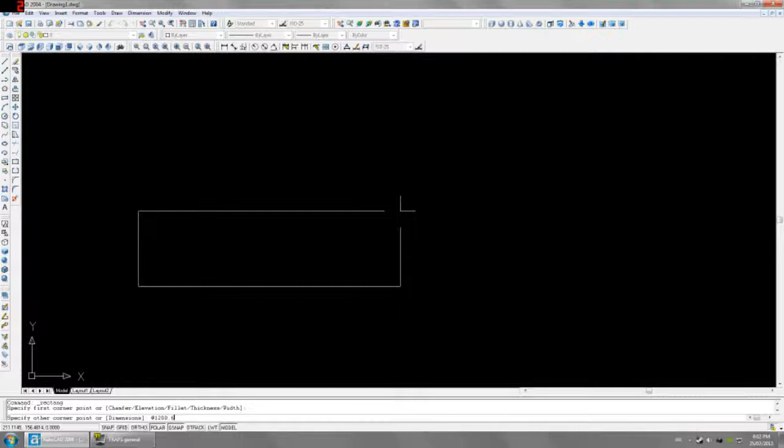So this will be the desktop. We're going to extrude it. We'll say it's 19 millimeters thick, so that's 3/4 inch material. If we change the view here, you can see we've got a top.

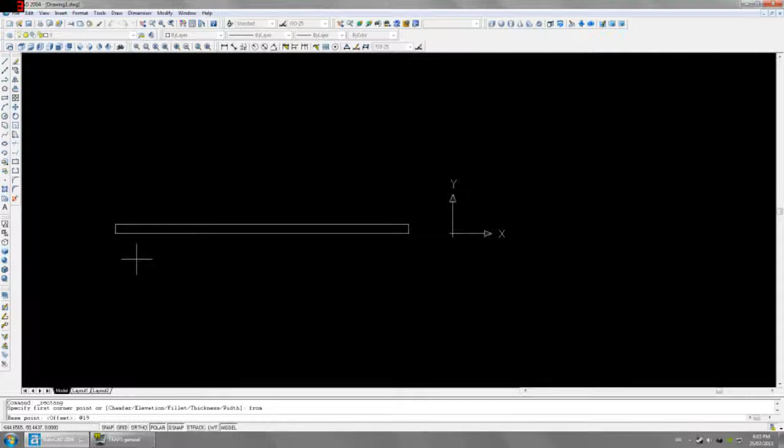Next, let's go to left view. And I'm going to use the from command. Say from here, let's just go over - how much overhang do we want? We'll say 19 millimeters, so 3/4 inches overhang.

And then, that was not the right word, from this side at -19. And how tall do we want this desk? My desk here is about 30 inches. So yeah, that sounds good, do it maybe a little bit taller.

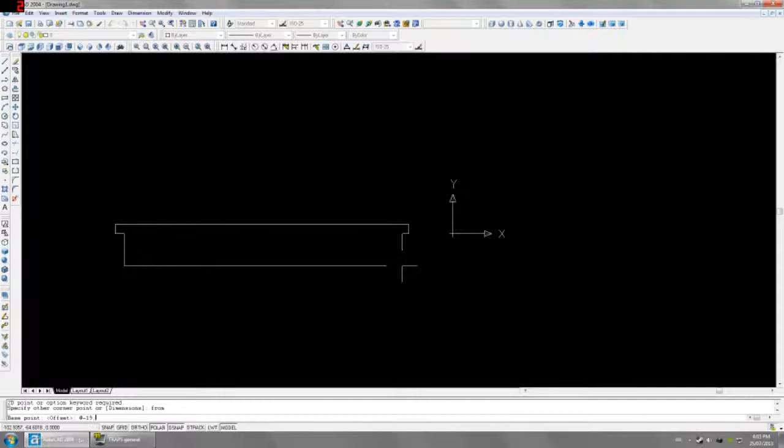-750. We will extrude this as well to 19. If we do a front view, we can see it's a little bit off here.

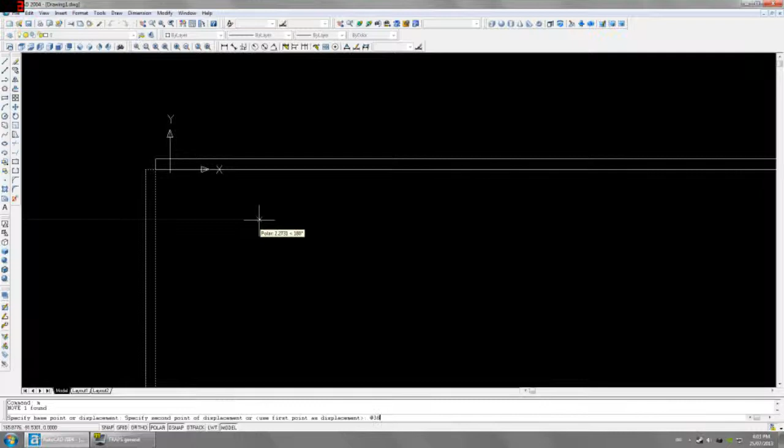So let's move it over 19 and then over 19 again, so over 38 in total. We'll want this on the other side, so just went a little fast there. Do that to select it. We'll use the mirror command. Now we've got one on the other side.

Now let's imagine that we want some drawers in here. How big should we do the drawers? Well, first of all, we need to determine how big of a space do we want here so that a chair can fit in. My desk chair here, well, if I had handles, we'd say about 30 inches.

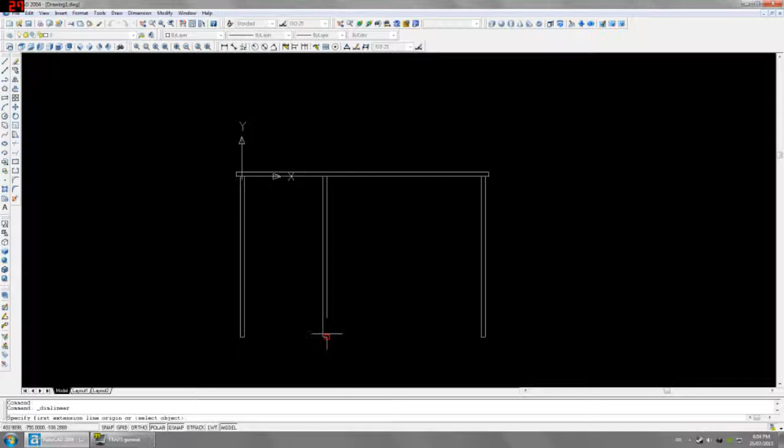So what was 30 inches? I'm using a tape measure just so I can quickly convert these things. Okay, so we'll take this, we'll copy this over -750. Then we can dimension that just to see how my math worked out. 28 3/4 - yeah, that sounds okay.

How big will that leave the drawers? Because the drawers I want to put in here - 14. Yeah, that's a sizable drawer.

Okay, so this is just going to be an open space. So in order to have the rigidity that we need, we should put in a back. It doesn't need to go all the way. We'll try maybe a little more than half.

So we'll select that, and let's go down an additional 2 inches, which is 50 millimeters. We will extrude that to 19.

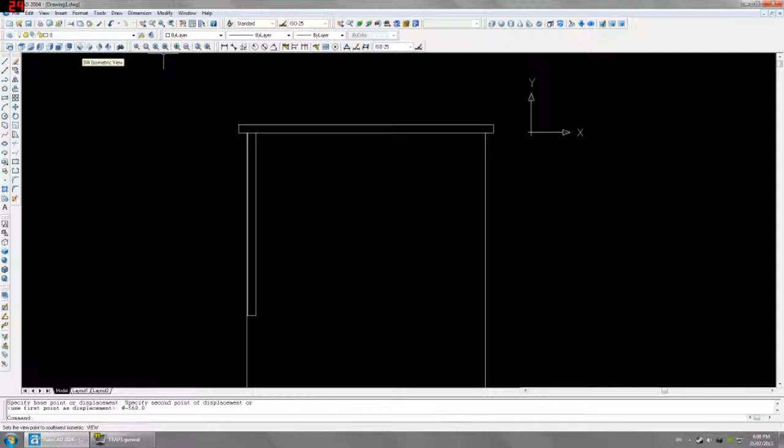Now, this is the back of the unit here, and that's where I want this to be. So I need to move it 562. But we'll move it back just 560, because then you've got a little bit of space there, so once you build it, you wouldn't have any extra stuff sitting around.

This is what we've come up with so far. There's 3D orbit. So it's looking a little desk-like. Let's just undo that, go back to wireframe.

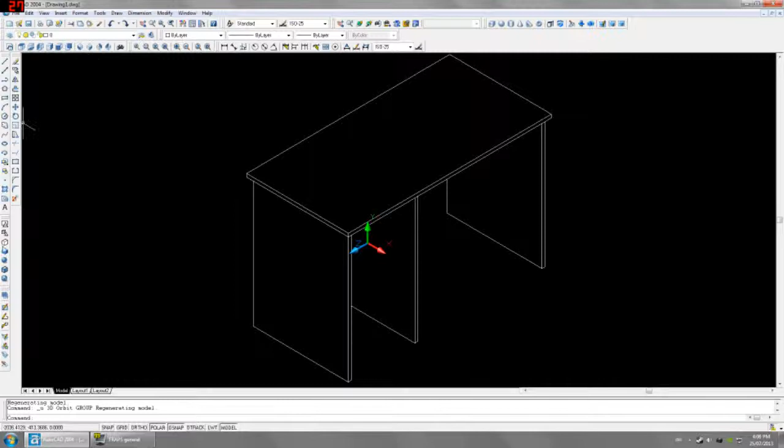Now we'll do a front view. How many drawers can I fit in here? 750. Huh.

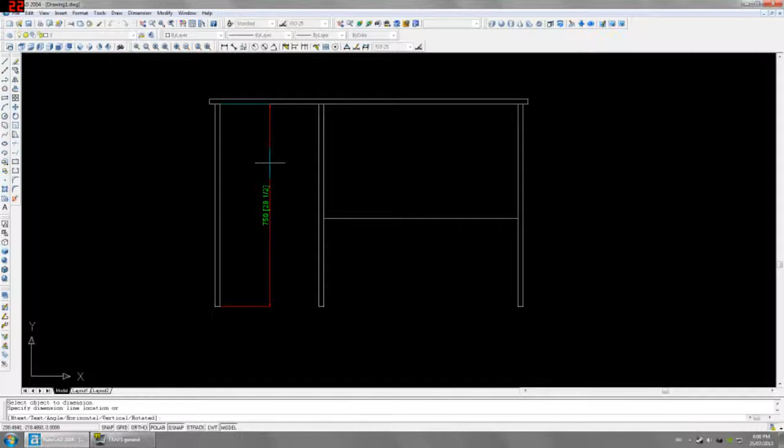If it's 30 inches, each one should be a little under 10 inches. I'll probably want a little bit of space at the bottom too. So here's what we're going to do.

I'm going to go rectangle, we'll use the from command. Click there, at 3, -3. Is that enough space? You know what, I want to do a little bit more space than that.

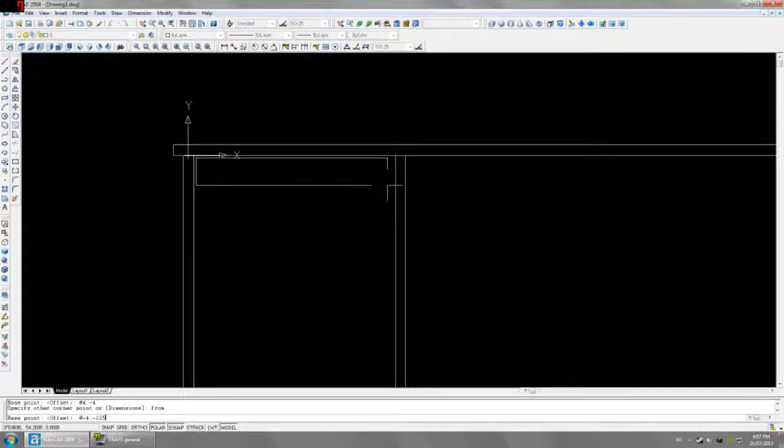So we'll do that again. From... at 4, -4, so there's just a 4 millimeter space. We'll use from again to select this point. I want to go -4 and -225. How does that end up looking?

That doesn't look too bad. Now to make things go a little faster, we'll mirror that. Move that down by 4. We'll mirror it again - actually, I can cheat here.

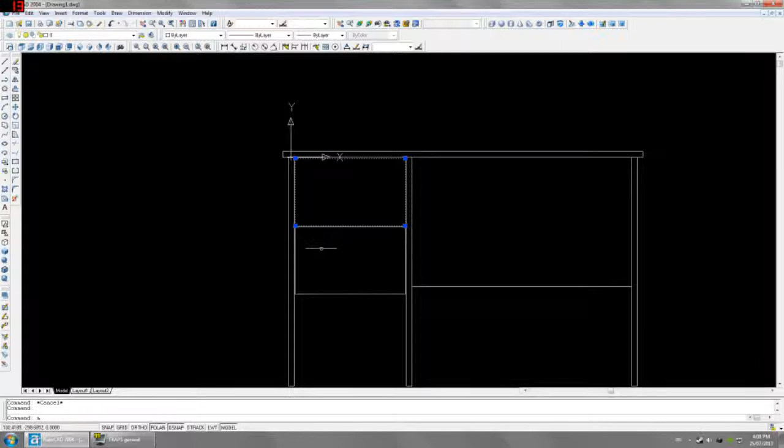I'll select the top one. We'll mirror it again, that has the space built in, and I think that's enough space to the floor. Yeah, 3 inches to the floor, that's about average.

Alright, I need to extrude these things, so I'll select them all. Again, we'll extrude them by 19, just keep all the material the same thickness. Now this needs to move in. We'll inset it by 2 millimeters, so instead of going 19, we'll go -21, 0.

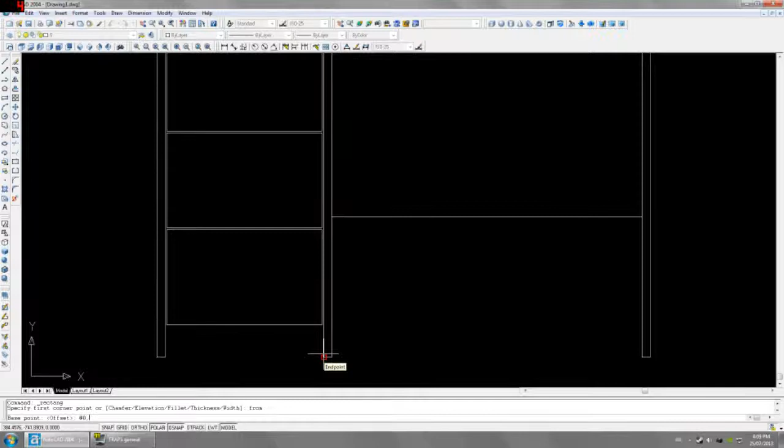I'll want to put a bottom in there, but let's do the drawer body first. So we'll go to the side. We'll want a back on here too, so let's do the back. And we'll take it from this point. We'll go up 75, because that'll take us to the bottom of the drawers. And then we'll go there. Then we'll extrude this by 19.

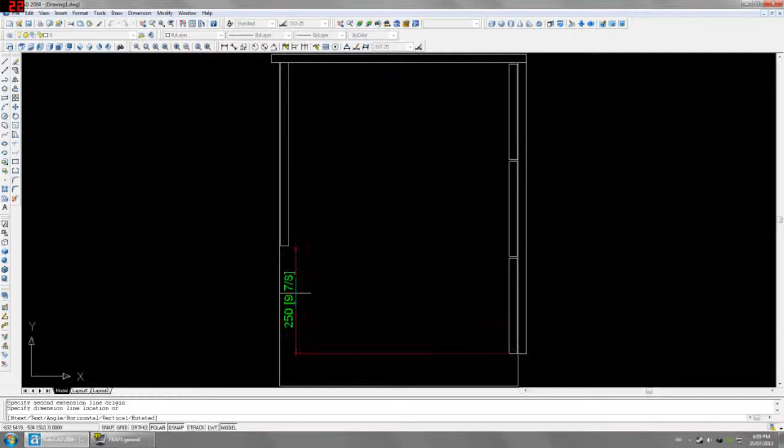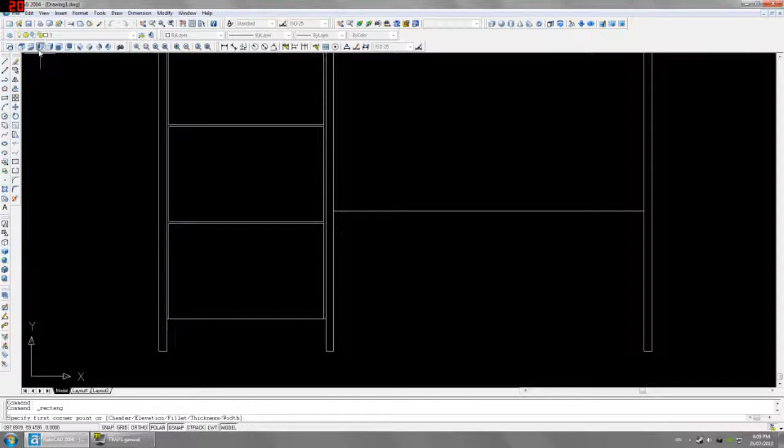Now we want this to be in line with the other back. So we need to go back 560 millimeters. So now we've got a back there. I'll also want to put a bottom in. Yeah, let's do that right now. Side view is probably better for a bottom. So I want the bottom to go from here right to there.

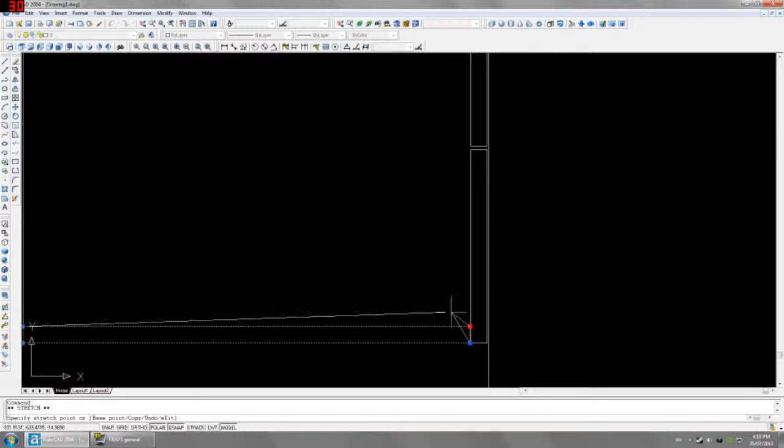I won't actually want it quite touching that though, so let's move it back by 1 millimeter. Because if you select this, click on the, I think these are called grips. You can move it however, or you can use a keyboard command. So I just did at -1,0. That should be okay.

What we have to do now though is we still have to extrude it, only instead of extruding it for thickness, we're now extruding it for width. So I need to go 374. Extruded it the opposite way as usual. I'll need to move it over 370. And now we've got a bottom going.

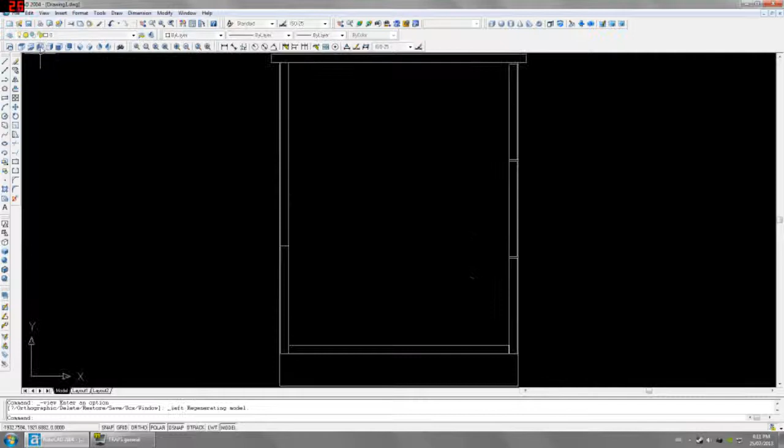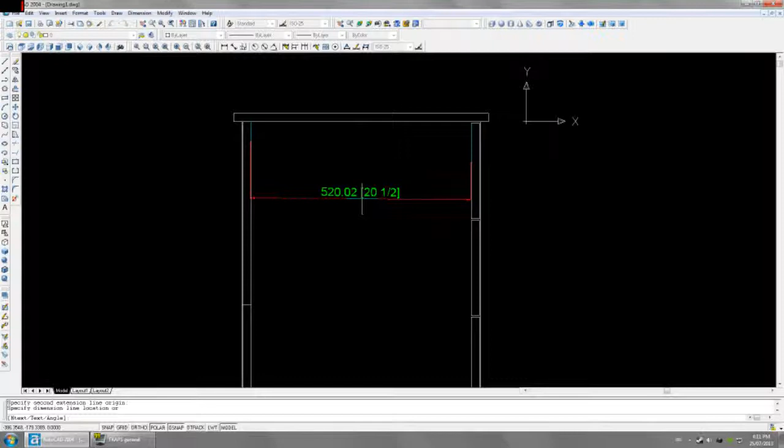Now we're lacking the insides here. How deep do we want to make the drawer? Well, we have 20 inches of space. Obviously don't want it to go right to the back, otherwise it might not be able to reach. Let's assume we're going to use 16-inch full extension slides, which means they'll pull it out a full 16 inches. If that's the case,

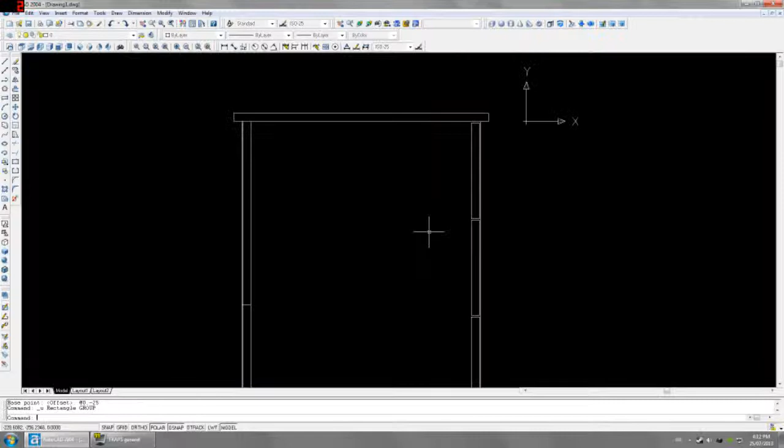I should start at the bottom because I got to remember I need a little bit of a gap there. So we'll start there. We'll go up an inch. Yeah, that should leave enough space. Then we'll go from again. And we'll go down an inch. Oops. Okay, let's undo that. I forgot to add in the second coordinate for the from command. Here is okay. I'm going to go up 25.

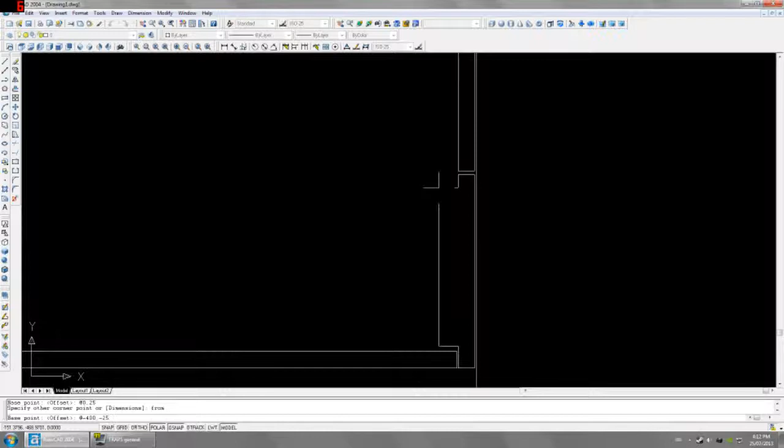Then I want to go back 400, which is a little under 16, and then down 25. So we're going to end up wasting a little bit of space here, but you don't want the drawer to have part of it hidden in there if you want to store stuff right at the back. Normally it's pretty common to make drawers out of half-inch material. I'm just going to stick with 19 because I've been doing 19 for everything.

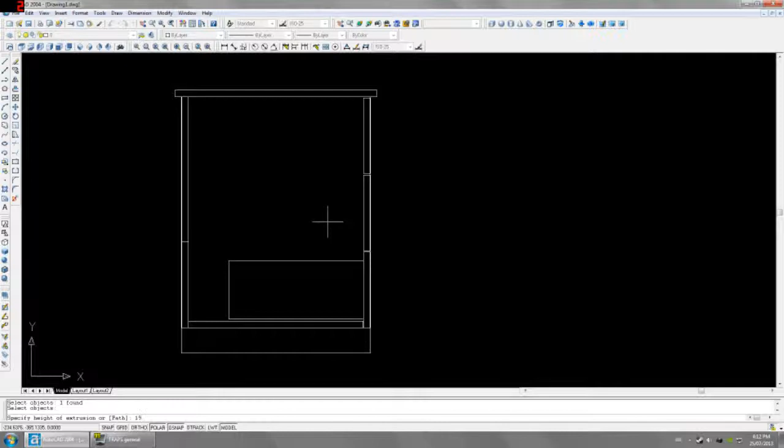Now here's the part where it's good to know a bit about your hardware. I know that the slides I'm thinking of, they're a metal ball bearing full extension slide, and their spacing, I believe they need half an inch of space, which is 12.7 millimeters. I'll round it to 12.5 just so the numbers are a bit easier. So I need to go over 15 to be flush. So 15 plus 12.5, 27.5.

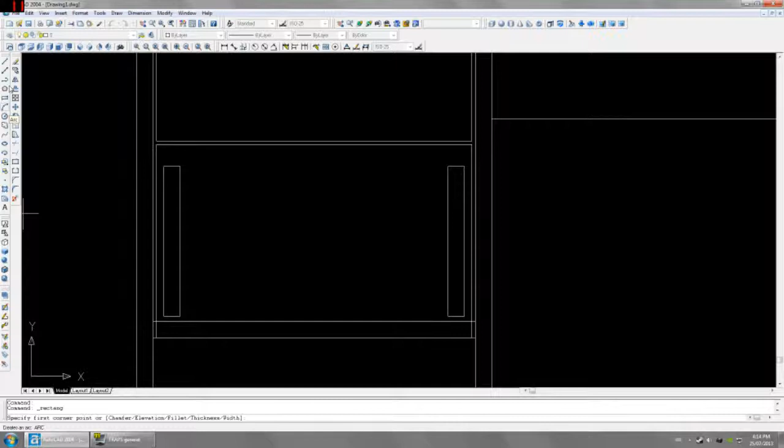27.5, comma 0, 27.5, comma 0. And that should be giving us our 12.5 gap, which it is. That's good. We'll mirror that over. We will obviously need a bottom. Let's do the back first, though. So I want a left view. The back will be easy.

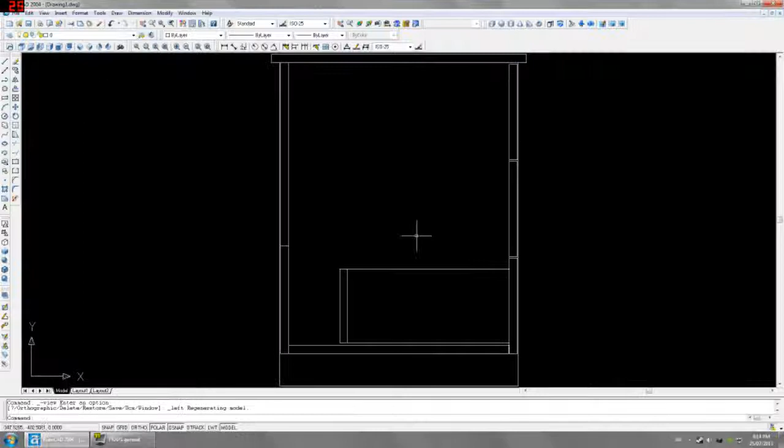We'll just click from there, use the from command, tell it to go 19 millimeters over. Then we just need to extrude it by whatever the inside width of the drawer is going to be, which is 311. So extrude 311. Again, it does it the wrong way. This time I can cheat and just use the mirror command.

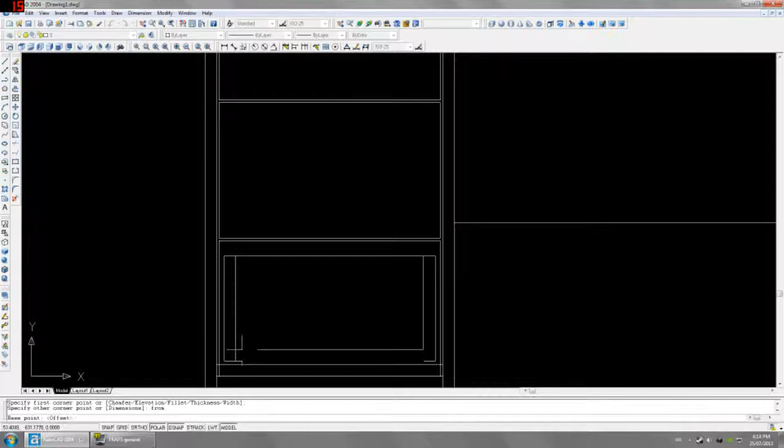And now we need the drawer bottom. So once again, just another rectangle. 0, 19. This is definitely overkill for a drawer, making it all out of 3/4 inch material. 381.

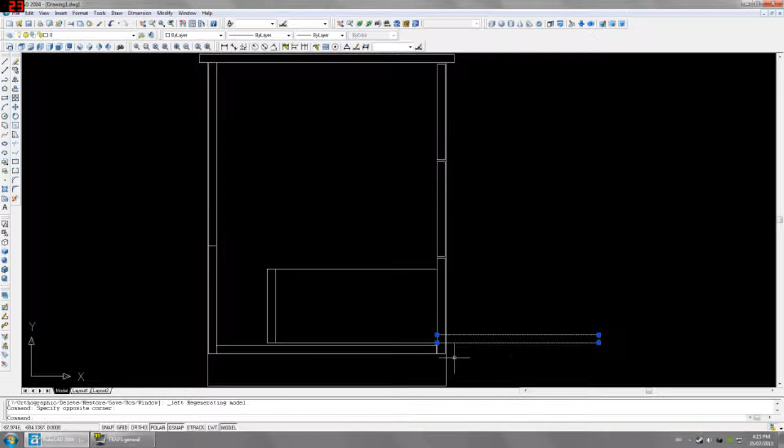381. Again, it's not extruding the direction I want it. I'm sure there's a way I could figure that out, but meh. Alright, so we've got a drawer.

Let's create a couple of layers here. Layer 1 will be, let's put on caps lock, drilling. Okay. Layer 1, drilling. Good. It appears to be having technical difficulties here. Okay. Drilling. Alright, let's go back in there and see if it's going to work with me now. There we go. Drilling will be green.

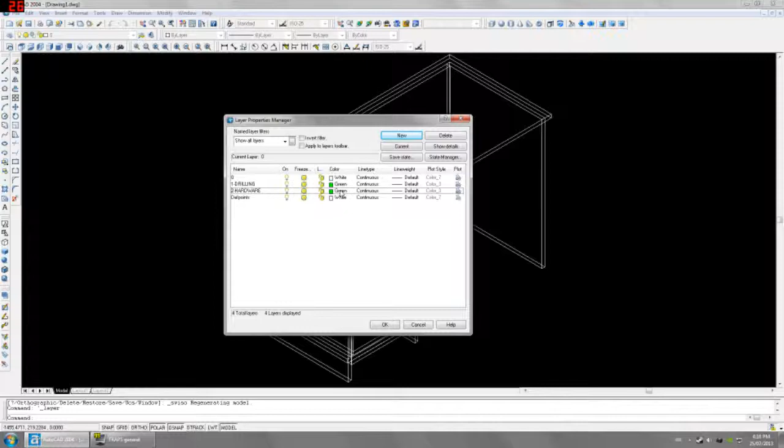New layer 2. Hardware will be red. I'm just going to draw in where I think I will locate the slides. I believe they are 2 inches wide by half an inch by 2 inches. Then I'll want to center that. 0, comma, negative 25, because it's half of 50. And it'll be roughly 400.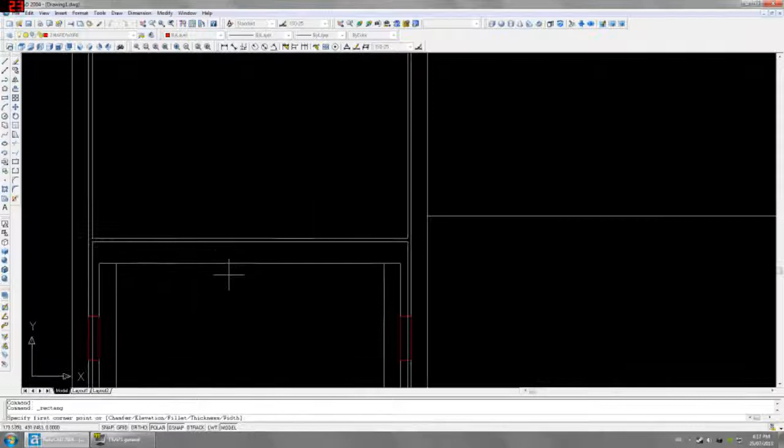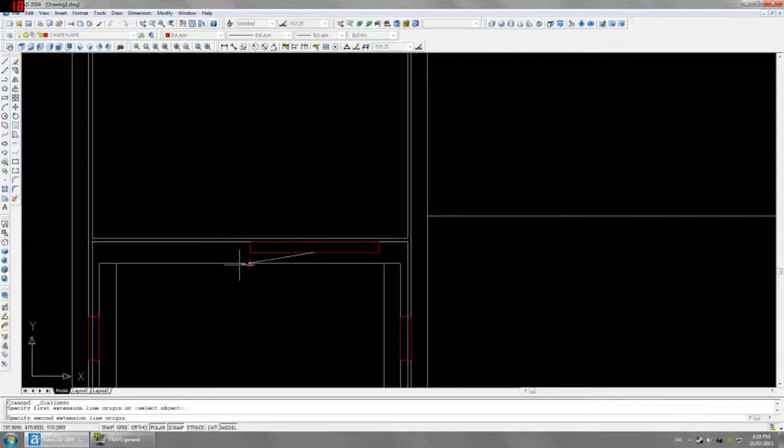And it'll be on the other side as well. So there's our first bit of hardware. We'll need something on the drawer. We'll just draw up a pretty basic handle. So it'll be square. How big do I want it? How big is this? 366. All right, let's go 128? No, 150 by 12. That looks all right. Want to move it to the center, which is 75.

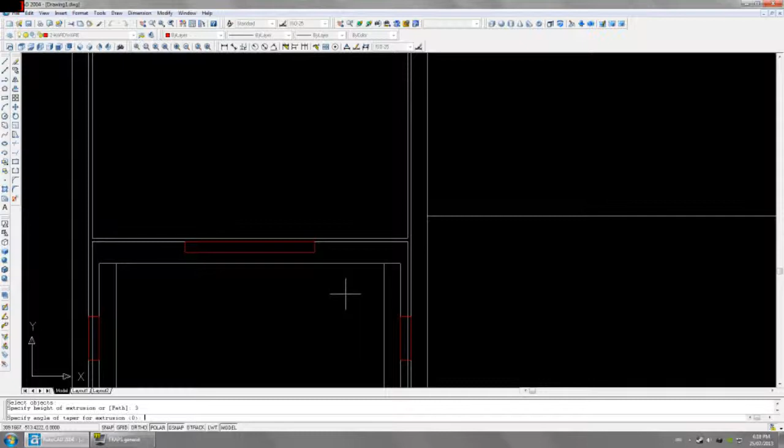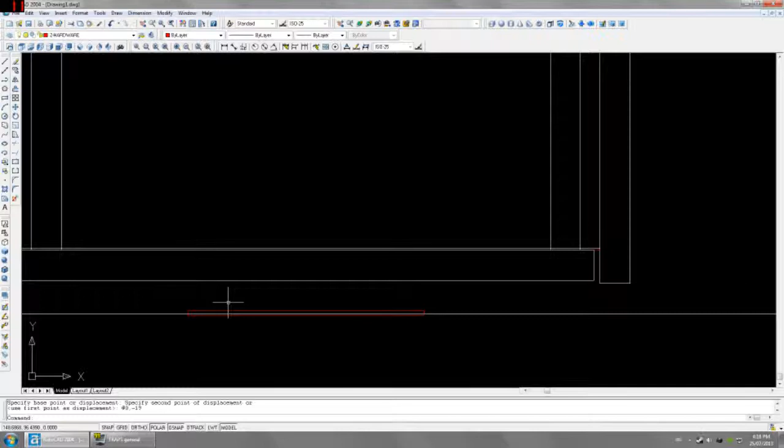We're going to extrude it a little bit. How thick should a handle be? Doesn't need to be that thick. We'll make that 3 millimeters. So if you do a top view, you can see we've got a little something here now. But we are going to move that down, or forward, I guess, in the grand scheme of things, by 19. 19 sounds okay. That should be enough space for fingers to get in there.

And then we are going to add in little bits here. How big should that be? We'll make that a square, so that should be 12. We want it to be 19 deep. As usual, wrong way. I can't stress how important knowing how to use all these views is, like going from top view, bottom, left side, right side, etc., as well as these views, just so that you can see how things are starting to look.

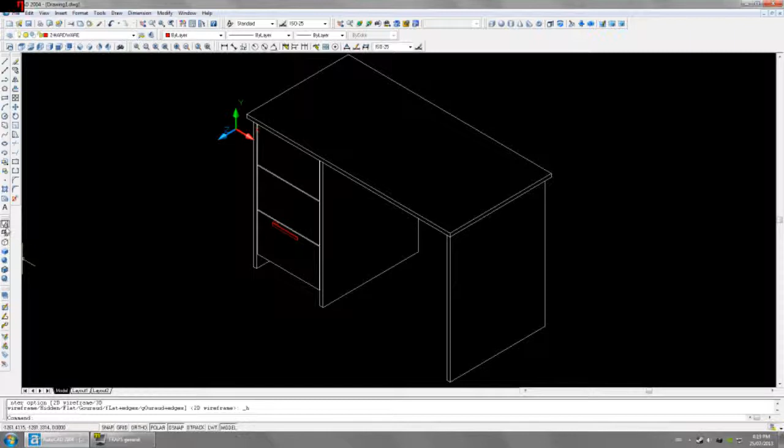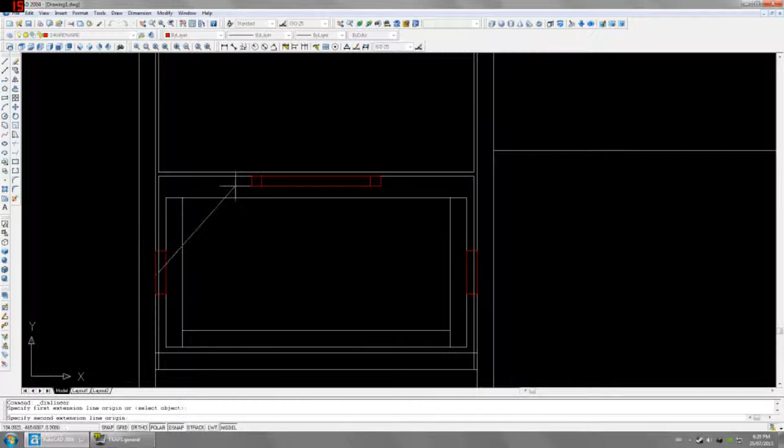We'll mirror that, and now since this is one handle, we want it to be one piece. We're going to union that and select all the parts, and now it has become one object. Obviously, I don't really want the handles quite there. I think I would like them centered. So if I go down 104.5, that centers it. So far, so good.

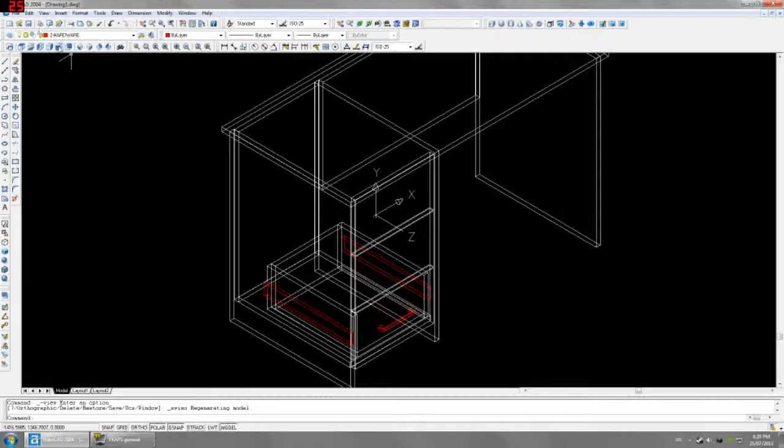And what I'm actually going to do is start putting in some drilling, because then I can copy everything up for the other drawers. So go to drilling. We are going to use object track. What that does is it lets you... I have to have a command here. We'll do a circle, which is just C. If you hover over it, it will leave a little tick mark there, and it'll remember it, so you can do something like this, and it snaps to both parts.

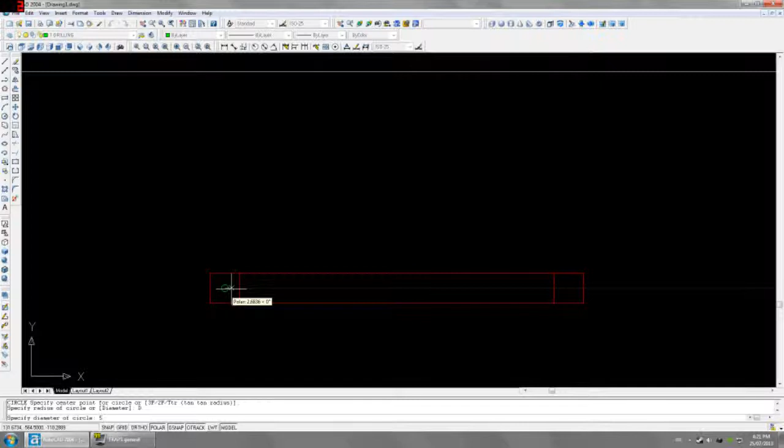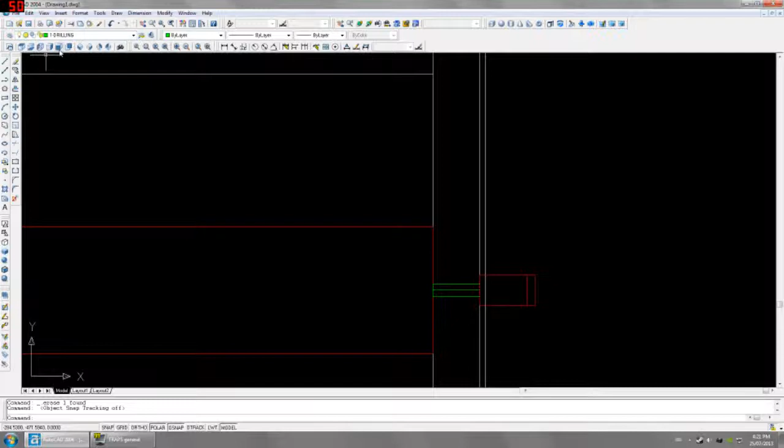So this hole, we'll do a diameter. I could do a radius, but I'm used to working with diameters. Do a diameter of 5 millimeters. We'll extrude it by 19, because it's got to go through the front. We'll mirror it, because we're lazy. Now that I've got that, I can turn off object track. Sometimes it gets kind of confusing. Obviously, whatever handles you had, you could change this to work with them. I just made up a handle because it was easy to draw.

Now, if I remember correctly, it goes circle. Going to start there. Diameter, we'll say 5 again. This one, however, isn't going all the way through. So we will do it at 14 millimeters deep. And that will be one of the screws that goes in there. Now, this seems to be an industry standard, but I don't know if it's for all things. Usually, the first hole is 37 millimeters back on this type of slide.

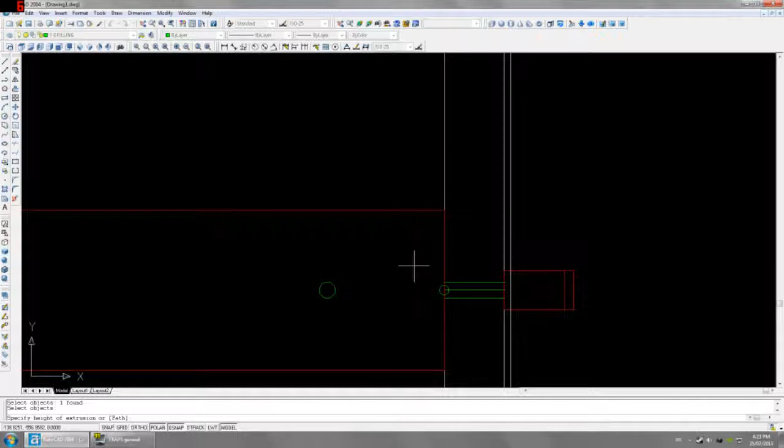And I believe the next one is 288. Usually there's another set of holes there, and then another set here. But for a drawer this size, you really only need the 2. So that takes care of attaching half of the slide to the gable, or the side panel. Then you need to do a 3 millimeter hole. Again, this could change depending on the slides you use. These are just really pilot holes, so we'll do 3 by 5 deep. Now we actually want this, which we can mirror off of the slide now, to be on that side. We don't need it there anymore.

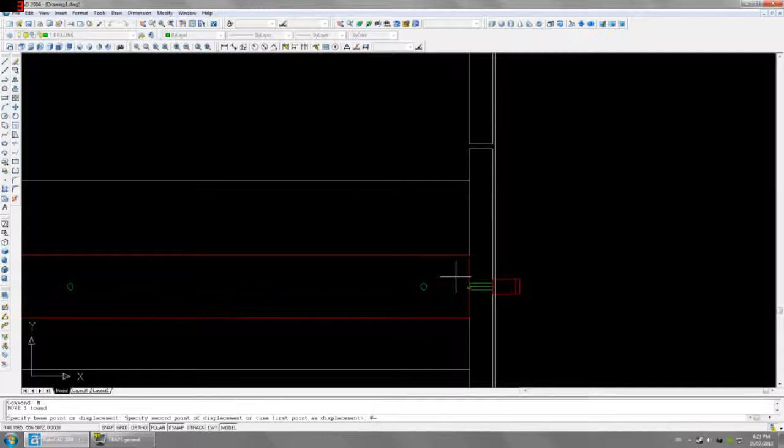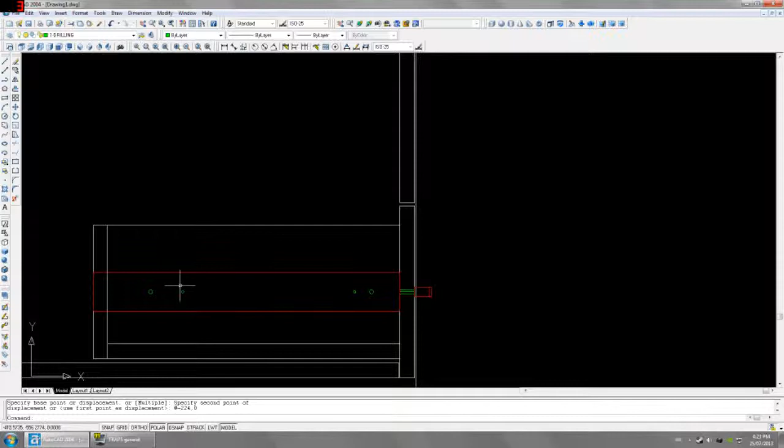And I believe this usually starts back 59 millimeters. I honestly don't remember what the rest is. So obviously you would just measure your slide and see what it is. We'll go, do I want 224? Sure. I feel like there should be another hole in here, but anyways, that's enough for demonstration purposes.

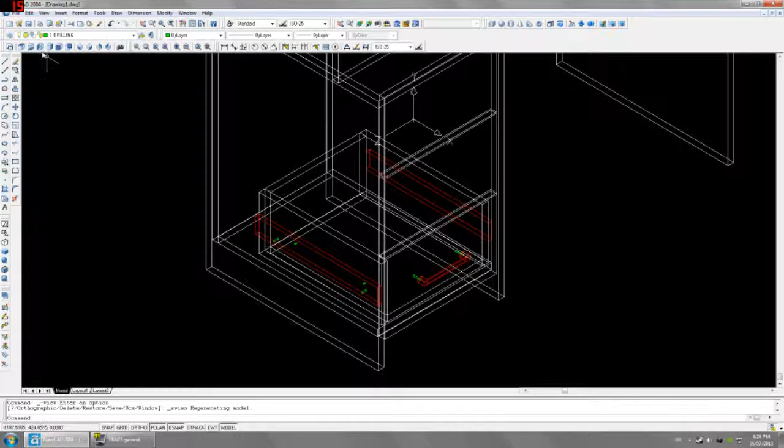Now you'll need some way to hold this together. I'm going to take the easy way and assume that we're just going to glue and dowel this all together. So we'll do a side view. And let's say we're using 8 millimeter diameter dowels that are 30 millimeters long. So we'll start up here. We'll do diameter 8. We'll extrude that by 14.

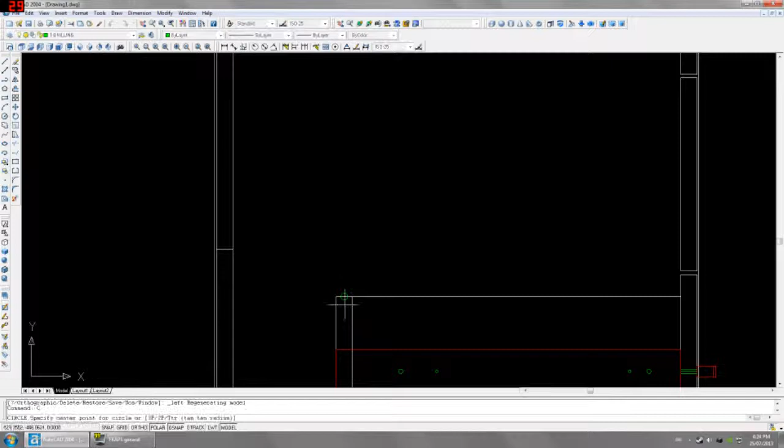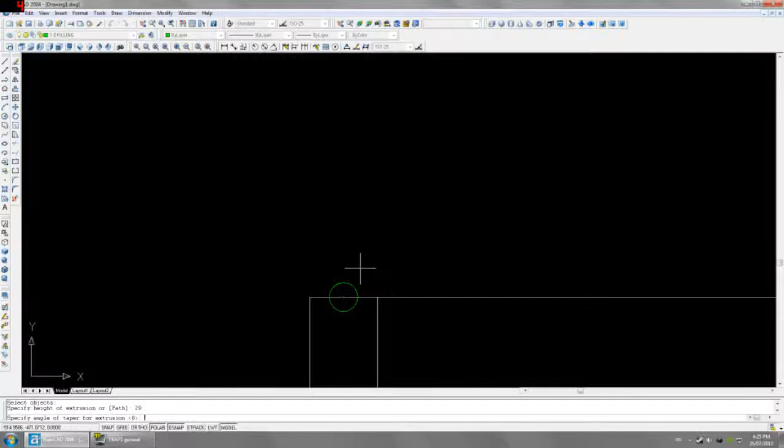And then what we need to do is do another one, diameter 8. So 14 and 16 are 30, but you usually want a little bit of extra space. It's okay if you select both because it can't extrude an extruded object, so it just grabbed the circle I just drew. We'll do 20. Now obviously, we actually want this on this side, so we need to go over 34.

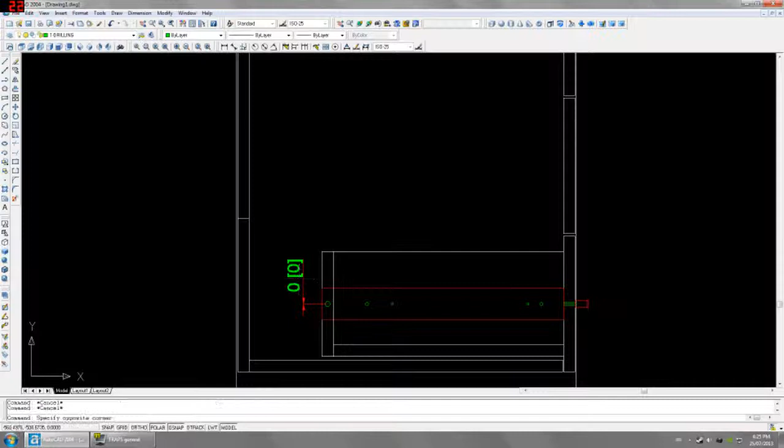And then we need to go down. Why don't I do it so it's centered? I could do the math, but I'm going to cheat instead. Go down 0, comma, negative 85.5. That puts it in the center. Then I'm going to move it by 50. That looks okay. And then all I have to do is mirror it again, and then that should be centered on the drawer.

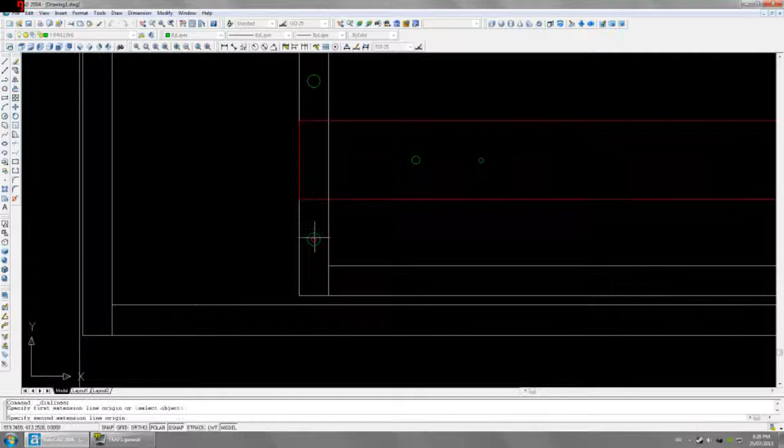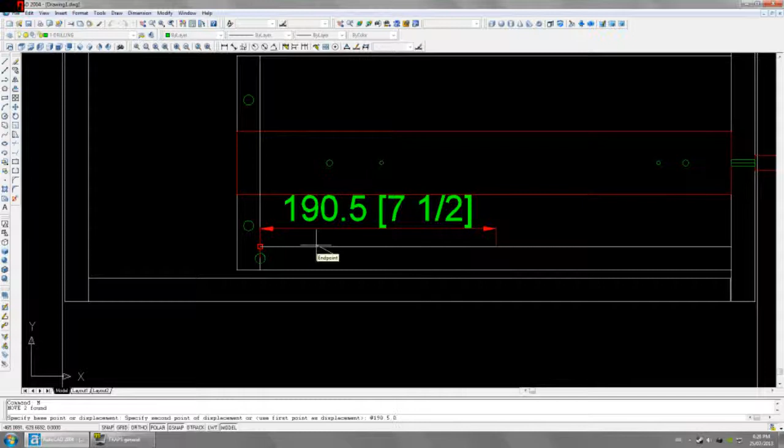We should probably put, obviously, a couple of dowels in here. Now rather than redraw stuff, I'm going to copy this down 26 and over 9.5. So over 9.5, down, was it 26? I think it was 26. And again, I'm going to move this to the center. We'll move it at, oops, second point. Okay, so over 190.5. That centers it.

I think I'd like 3 fasteners here. So let's go over 100. Oops. Sometimes I mix up my coordinates. Okay. Copy over 100, comma 0. It could go a little bit further than that. And maybe a little bit further than that. Just going over in inch increments, because every 25 millimeters is approximately an inch. So that should be okay there.

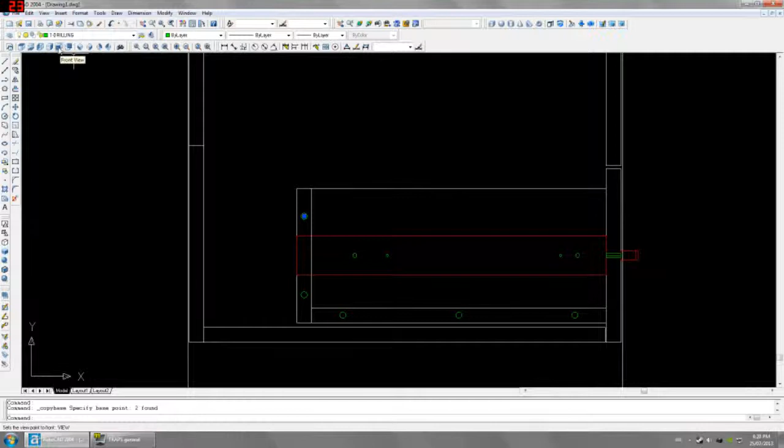Now I'm going to need to fasten these 2 pieces together. What I'm going to do is go up to Edit, and copy with a base point. I'm going to copy from there. Then I'm going to go to a front view, and if I've done this right, I can just paste like that. I don't know where that's going to end up. It ends up in exactly the spot I wanted.

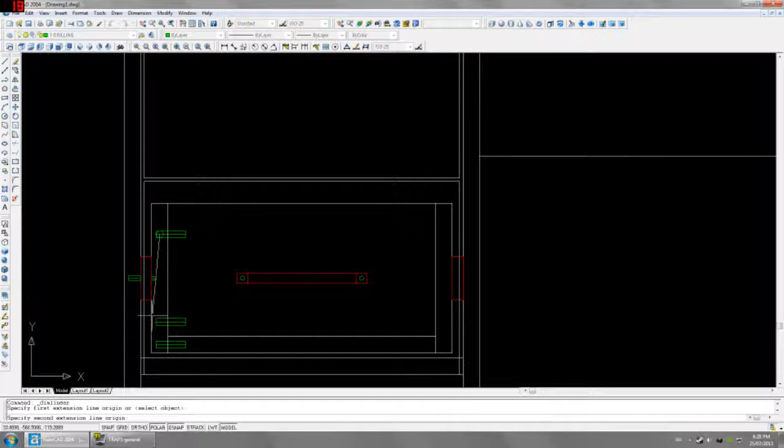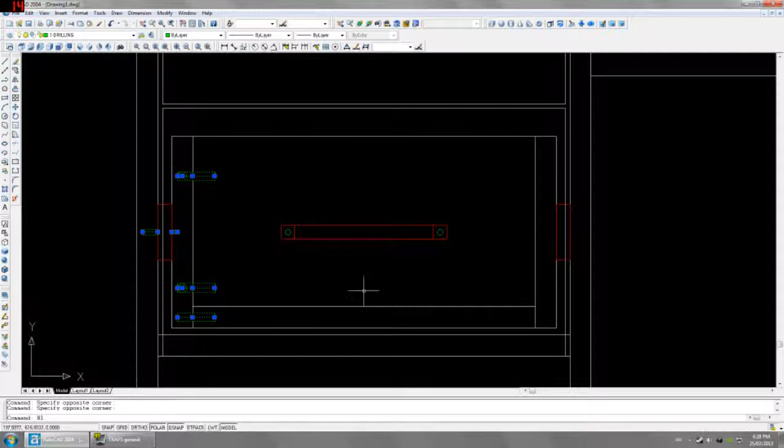So I will need 1 more fastener here, which is down 100. So copy, at 0, comma, negative 100. And I've got pretty much this side figured out. Now what I can do is select all this stuff just by dragging a box around it, use the mirror command, and now the other side's got everything it needs as well. So let's take a look-see here. That handle looks so junky, but whatever.

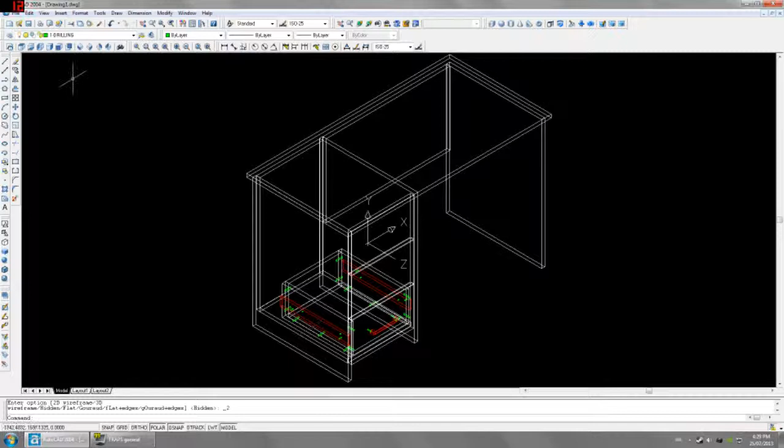Now the fun part. Well, there's 2 ways you can do this. Probably the easiest way is to do a side view. Before you drag a box around everything, measure from the bottom of your drawer to the bottom of the next drawer, and the bottom of that drawer to the bottom of the drawer after that. Then drag a box. Actually, if you're careful, you can drag a box right across everything, and it'll only select the stuff that's completely inside the box.

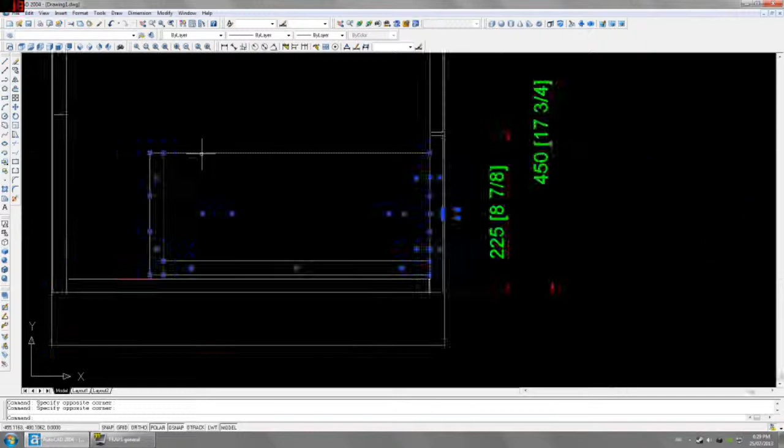So that is selected. Then you want to go copy. This time hit M because you're going to make multiple copies. It doesn't matter really where you select it. I'm selecting it at the bottom. Now you go at 0, comma 225, and then at 0, comma 450. And now you've got the insides of all of your drawers.

The next step, I guess, would be to fasten this bottom. Again, I don't really want to have to redraw much, so I'm going to copy this over 70 and down 25. Copy at negative 70, comma, negative 25. That puts it in the center.

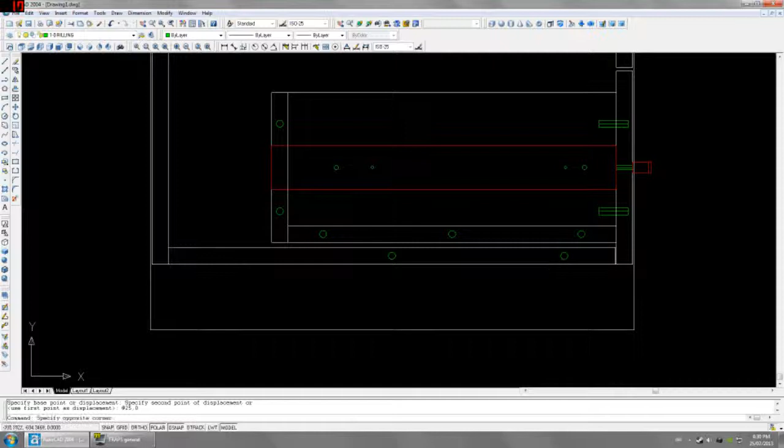We'll copy this at, how does 175 look? No, it should go over probably about an inch more. So 200. We'll mirror that. So we've got all those. Now, obviously, we need to move them so they make sense, since right now they're just in the center, well, not the center, but inside the panel.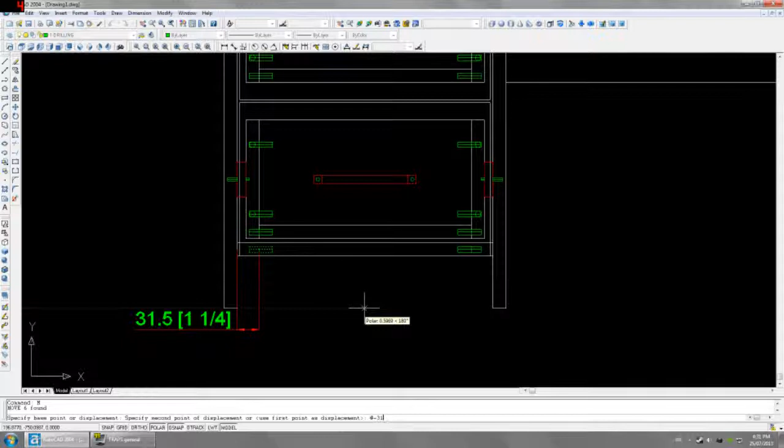So at negative 31.5, and it should be the same spacing here, so move at 31.5. So far, so good. As you can tell, it's starting to get kind of confusing in there, but pretty much everything you need to do inside that section is done now.

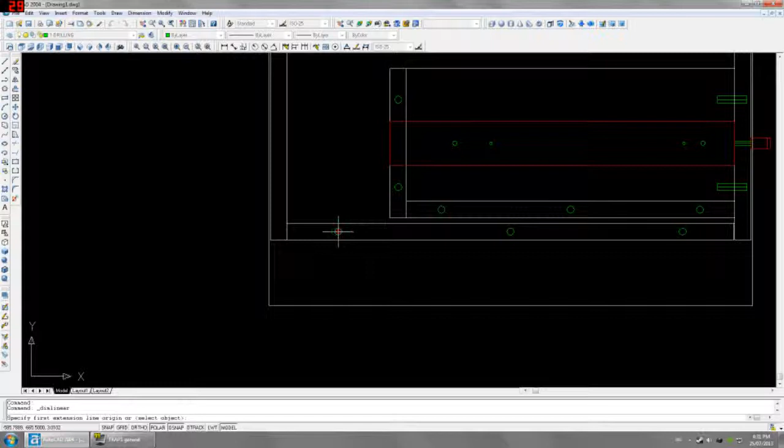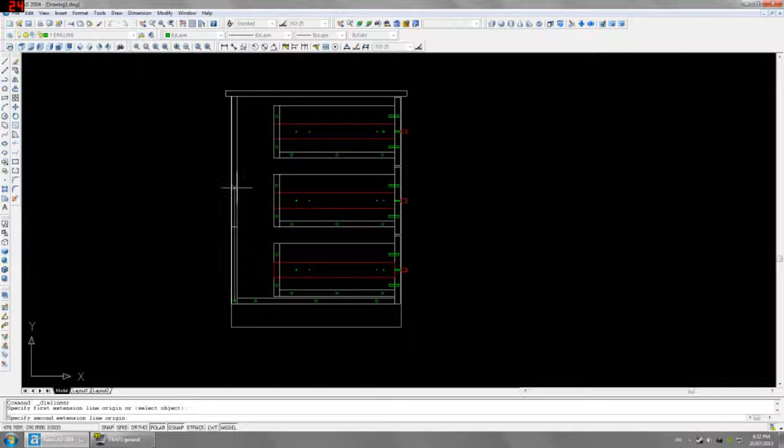We'll want to fasten the bottom now, or not the bottom, the back. Again, because I'm lazy, going to copy that over 69. Where do we go from here? Do I want to center it? I've been centering everything, so why don't we do that? To get to the center, we need to move this up 328 millimeters.

Now I'm trying to decide here if 3 fasteners would be enough or if I'd actually want to do 4 because it's a longer piece. I think I might actually want to do 4. So I'm going to move this down by 100. Copy it down by 200. And then mirror it off the center point. Now each one should be spaced 200 apart.

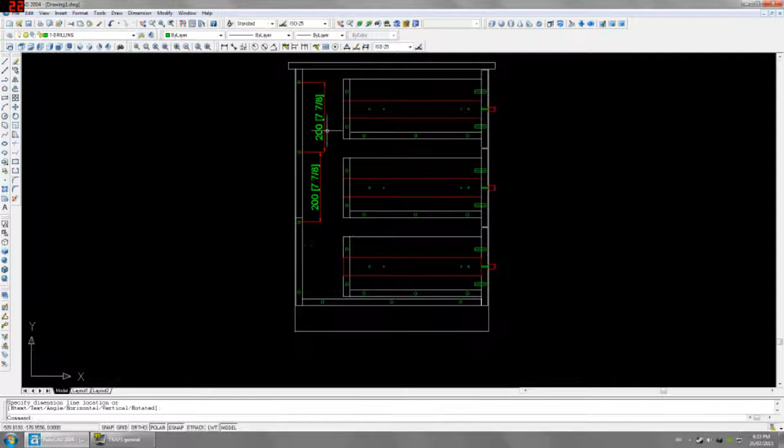What I'm going to do is I've got it set up for quadrants, so it'll select each quadrant of the circle, but it was getting a little confusing. Yeah, so each one is 200. Works out great. And I got both sides.

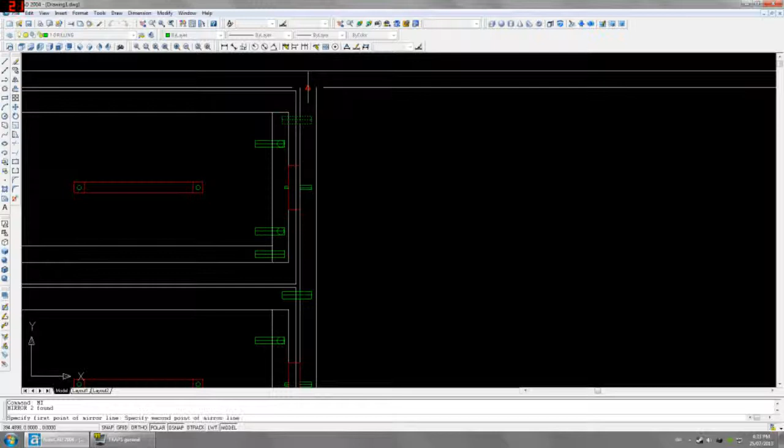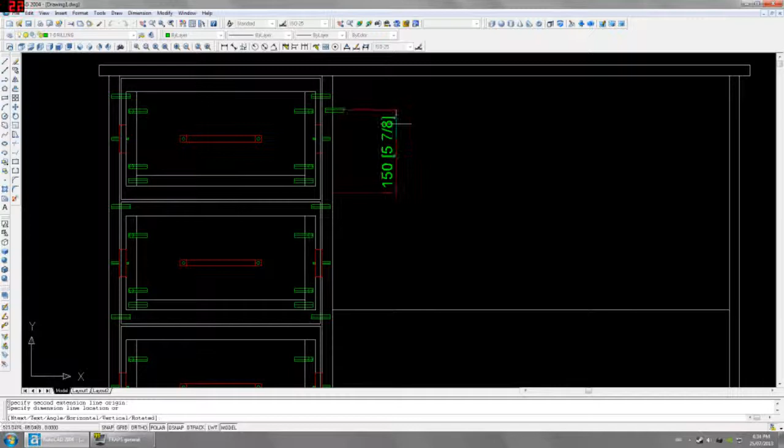Now what we'll want to do is we'll want to make this be attached as well to a front view. Obviously, you can't have the dowels lining up here because they'll bump into each other. So what I'm going to do, I'm going to select that, I'm going to mirror it over, but then I'm going to move it down by an inch. Or over by an inch, but now let me try moving it down by an inch. Okay, so this will work out.

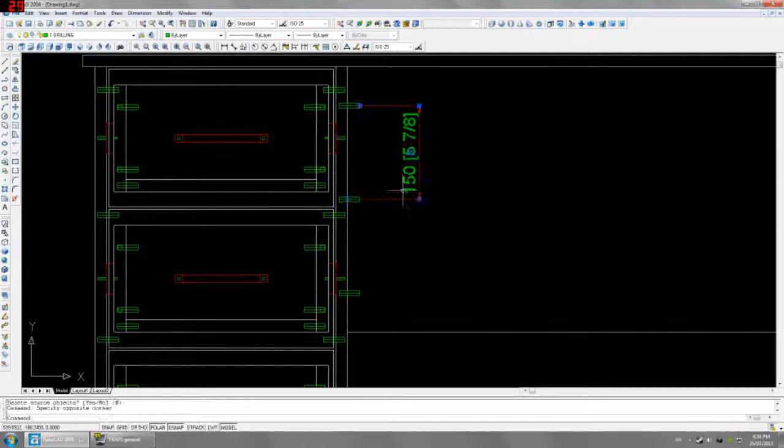We're going to copy it down by 150. Okay, negative 150. And to save some time, we'll do that again, mirror it down. And now we'll mirror it over. That takes care of that.

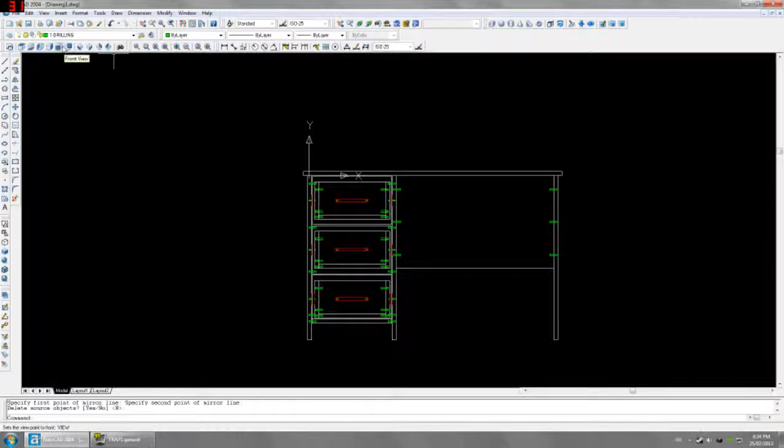Okay, all that's really left is the top. Again, I don't want to have to do more work than I have to. So I'm going to grab that. I'm going to go Edit, Copy with a base point. I'm going to select the midpoint there. Now let's see if I can do this. I'm going to paste it here, do a front view. Works out perfectly.

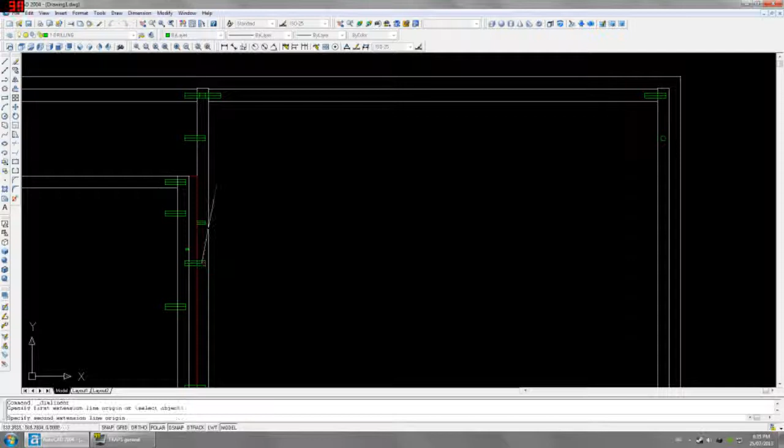And I think I'll just have this line up with these holes. So we're going to move it down, negative 45. That brings it in line. What spacing did I use here? Let's try that again. 200. So let's copy at 0, negative 200. And then we'll just mirror this.

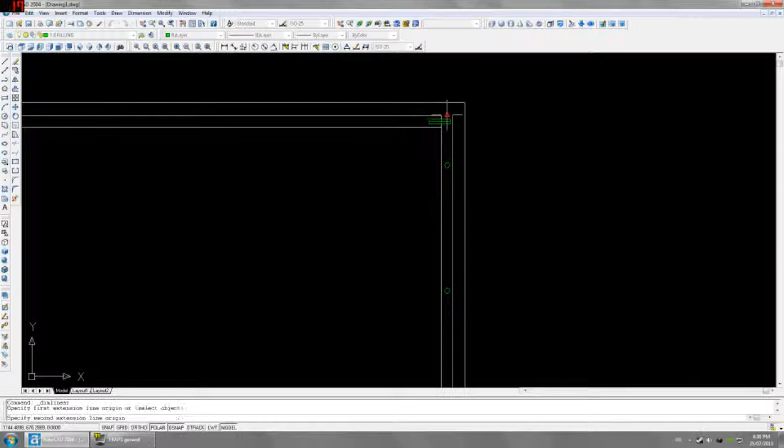We'll do the copy thing again. Just want to make sure that I get it to the right spots. So we'll copy multiple at negative 750. Oh, see, I did that as the first point of displacement, but it doesn't matter. Just hit the up button. It'll copy it again. It'll move it to where I want it. Then at negative 1143, comma 0.

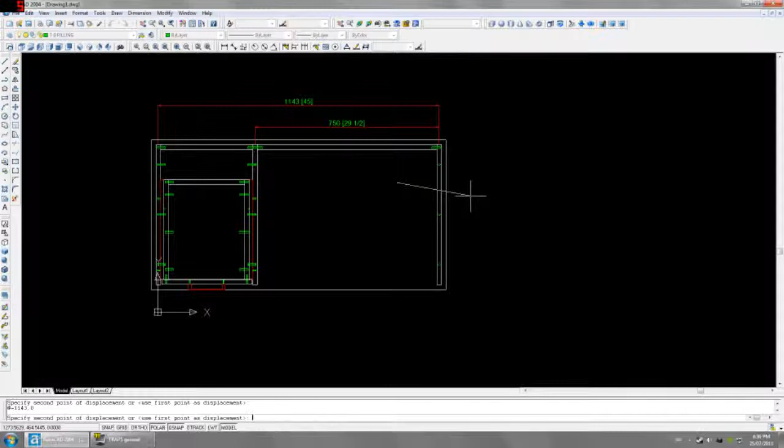I feel like I did something wrong here. Ah, see, what I did is the first time I copied them down instead of over. So now we've got a pretty functional desk.

But why don't we do a little bit more here? In fact, you know what? I'm going to do this in a separate video. I'm going to add a hutch to this desk, and we'll see how that goes.